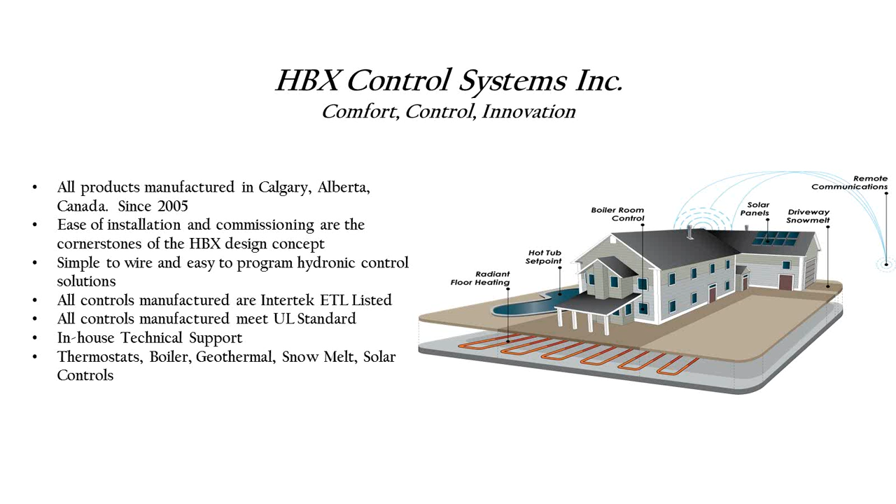Most people will know a little bit about HBX already. Product started testing in 2002. We sold our first control in 2005. So we try to keep things as simple as possible in regards to setting up the control, wiring the control, ease of use. So we have everything from thermostats, boilers, geothermal, snow melt, solar controls.

So with our new CPU-0550 control, we made many changes over the previous CPU-500 boiler control. So we have a new enclosure, a new display, and it comes with a 3-button user interface that's extremely easy to program, and you'll be able to see all your system information on the main screen.

So this control can be used with the following applications. You can use it with staging, mixing, differential set point, or as a pump sequencer. If you need a geothermal application, the previous CPU-500 had that programming inside that control, but now you'll purchase our brand new Eco-550, and that's a dedicated geothermal control.

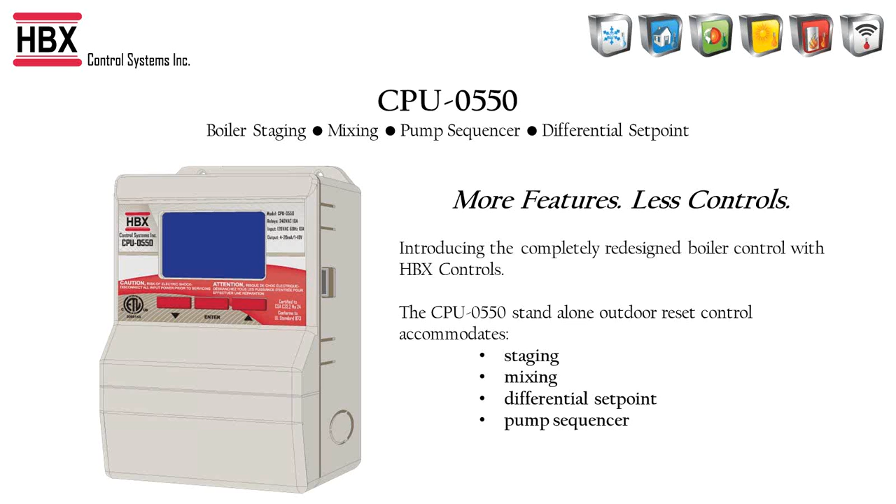So here are some of the main features of the control. You can do up to 3 on-off boilers or a single mod boiler. You can do multiple pump selections, a domestic hot water, boiler pump, a system pump, your boiler runtime rotation. You have multiple mixing options. You can do injection, a floating action valve, or a 0 to 10 volt.

Some of the main benefits from this control is it's really easy to program. It's easy to wire up. We have color-coded and keyed terminals. And all your system info is displayed on the main screen.

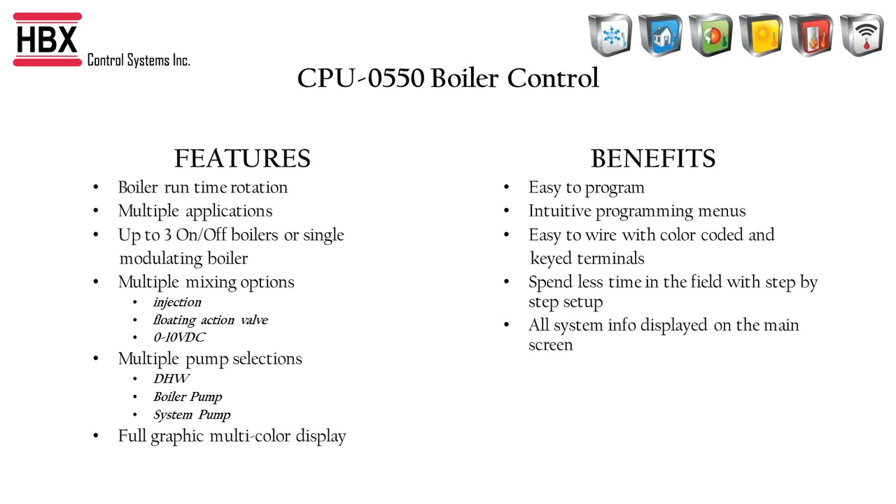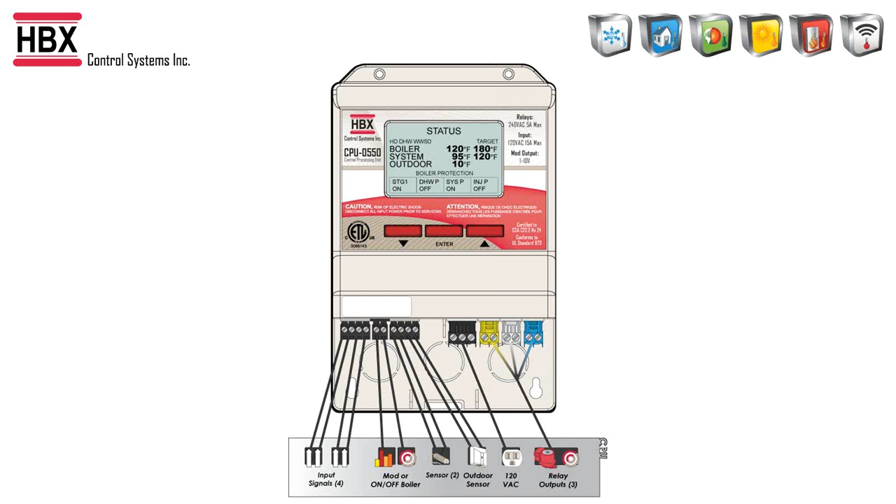So here you can see where you would wire your demand inputs into, where your sensor inputs would be wired up, and then also your relays. Over on the right hand side you have your 3 relays there, 1, 2, and 3, and then your power supply is basically right in the middle of the connectors.

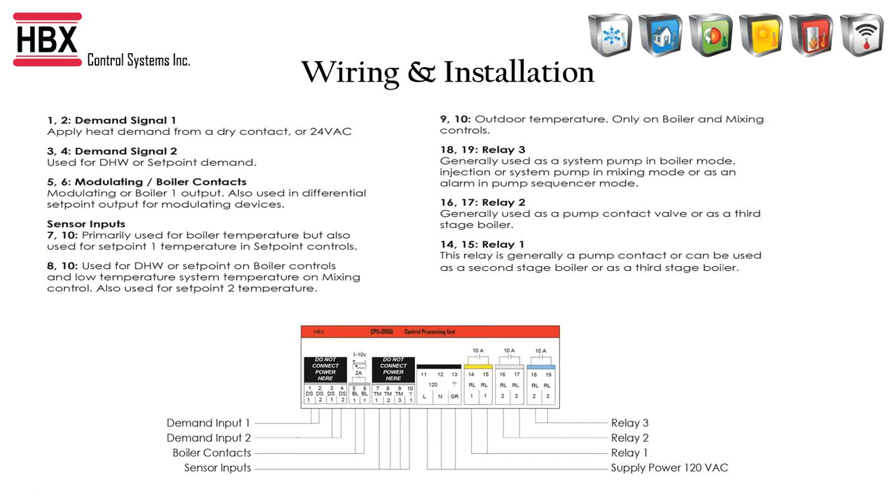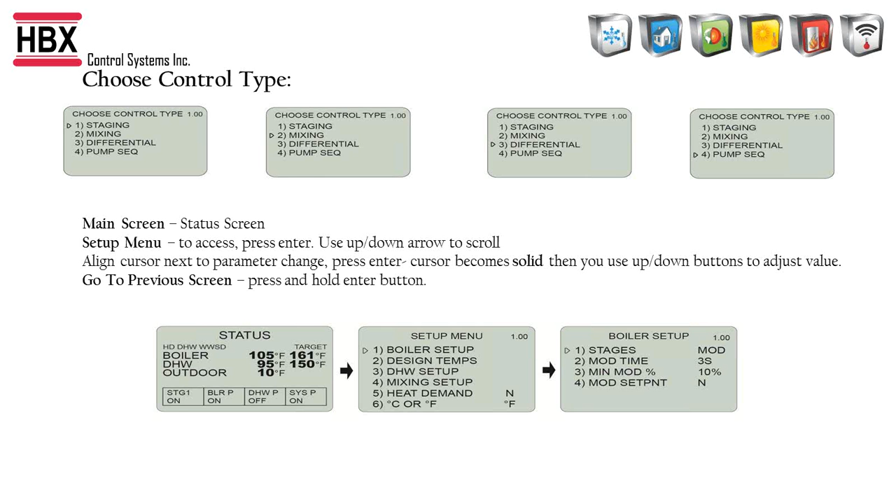So when you first power up the control, this is where you will choose what application you need the control to be. So from there, after you choose, the display will take you into the status screen. So on the 3 buttons, if you press the enter button, the middle button, it will take you into the settings screen. So it'll go into setup mode. And then if you choose number 1, boiler setup, that's where you can get into some further control options and settings.

So we'll get into some of the applications. So as a boiler control, it allows the capabilities to run 3 on-off boilers or a single mod boiler with domestic hot water. So you can see there's a system status screen along with the system function screen on the display. So with the CPU-1000, we had 2 different screens. So what we've done is we've kind of condensed it and put it all onto the main screen, so you can see all your information without having to scroll through multiple screens.

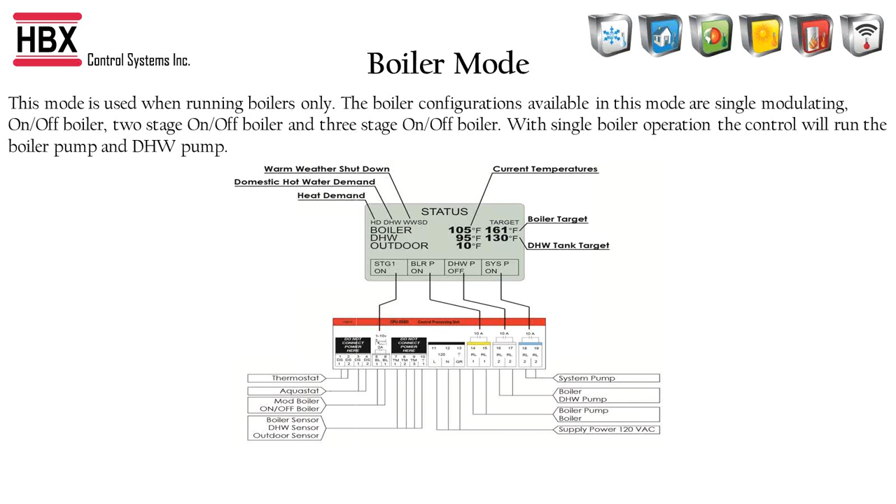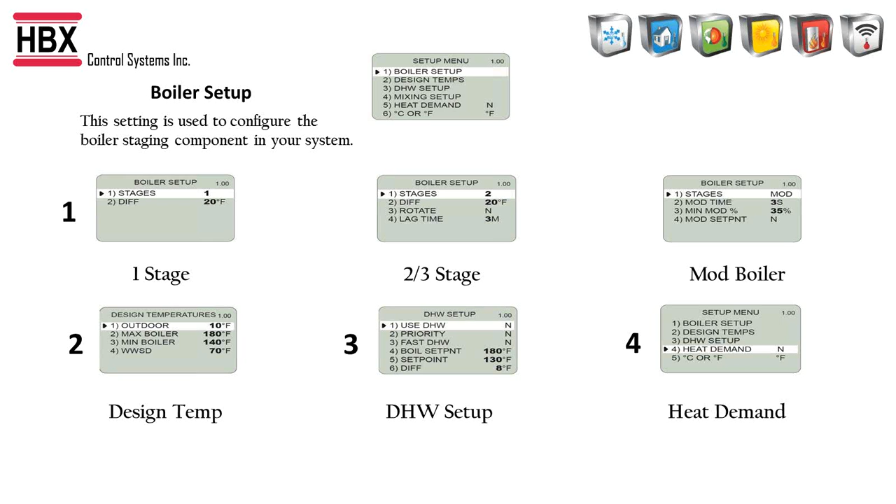So these are the settings in the control you'd adjust when choosing a boiler control. You would have 1, 2, or 3 stage or a mod boiler settings. You'd have your design temperature, a domestic hot water setup, and then also your heat demand. So pretty straightforward for setting up the control with all the applications. There's not a lot of different screens you're going to have to go into to make changes.

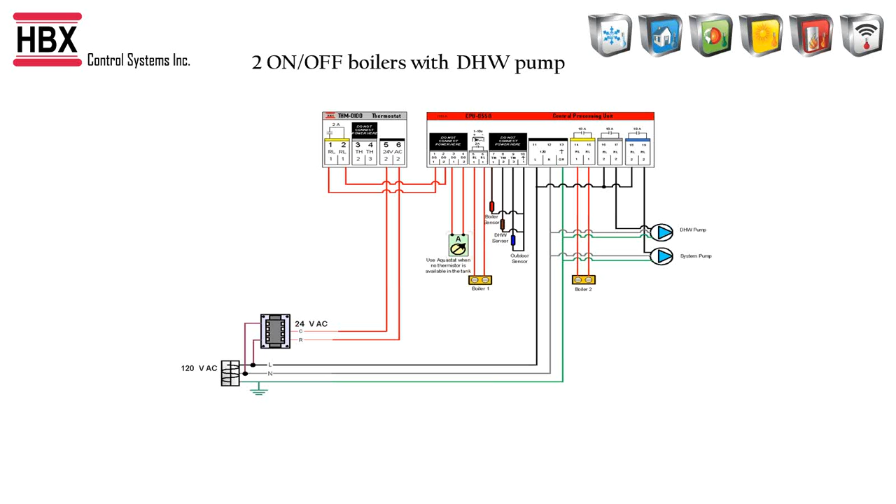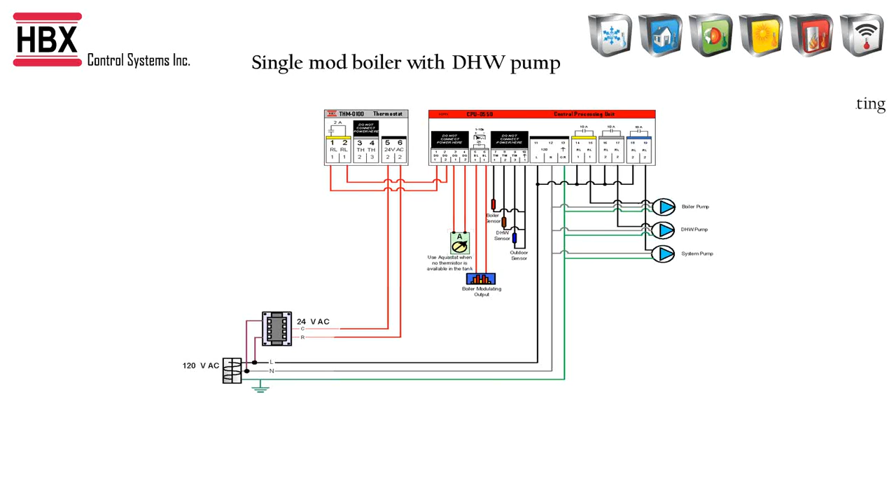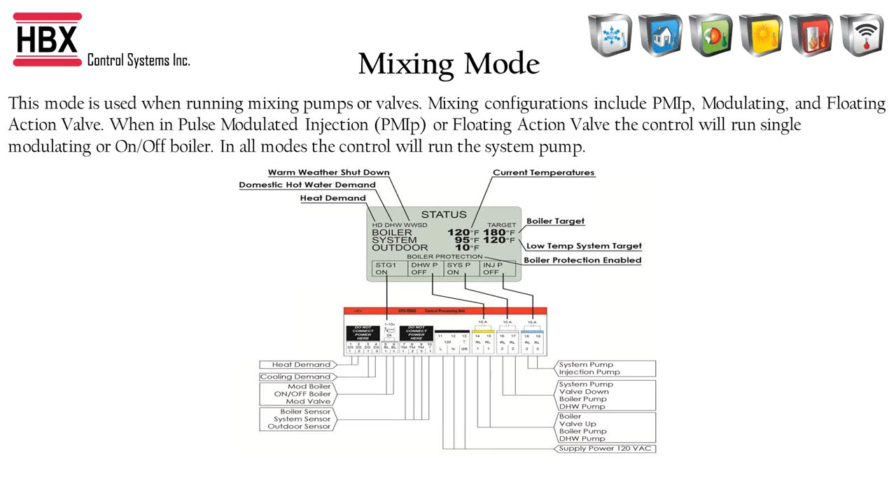So the next one would be mixing control. This control has the capabilities to run a single on-off or a mod boiler. The mixing types include a modulating, a floating action valve, or an injection pump. With the mixing setup, you choose 1, 2, 3 stage or a mod boiler. You set up your design temperatures, your domestic hot water settings, and also the mixing setup.

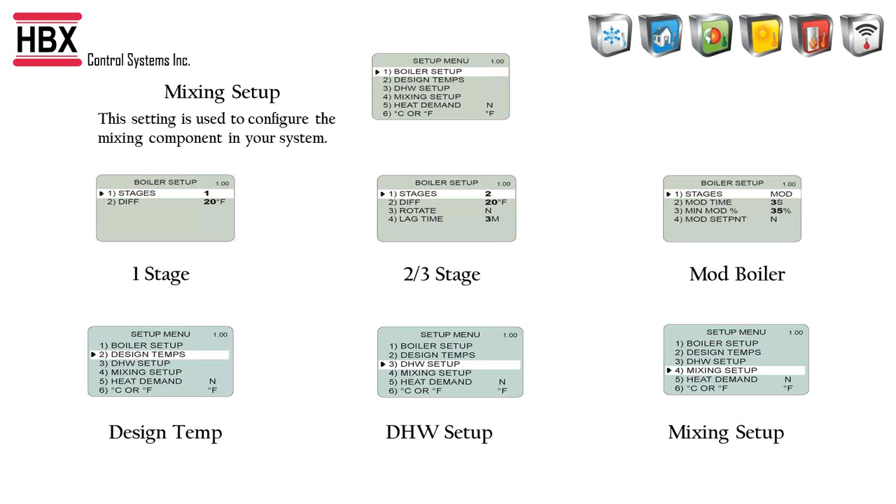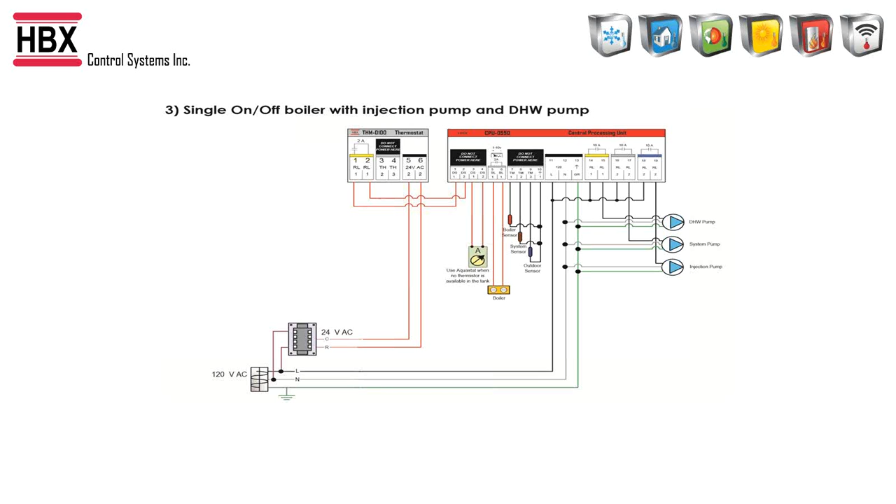And this one is a single on-off boiler with modulating valve output, so a 1 to 10, and also has a domestic hot water pump.

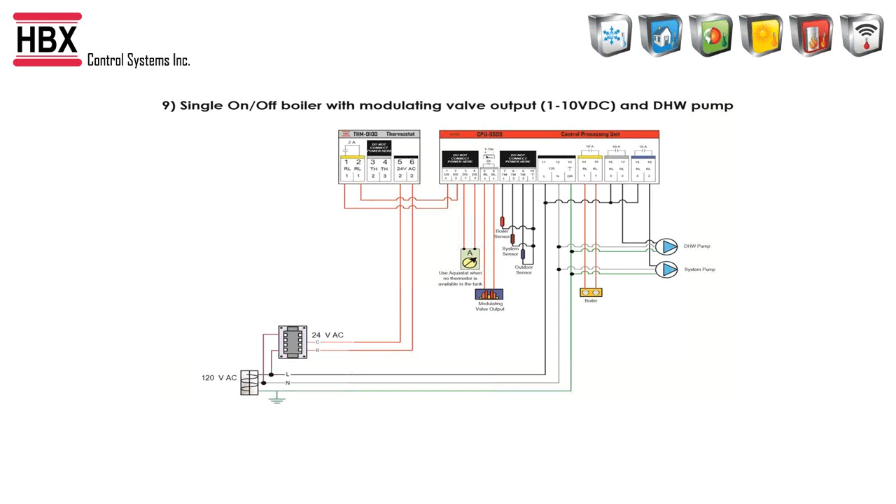And this is a single modulating boiler with a domestic hot water pump also. And then you have 2 on-off boilers with a domestic hot water pump. So all of these wiring diagrams are in the manual. We try to put as much as we possibly can within the manual.

If you ever need wiring diagrams, you can get in touch with customer support or tech support, and they'll be able to give you a wiring diagram based off sequence of operations, or if you have a mechanical drawing and some of your customers need a wiring diagram to go with the control, let us know. We can definitely do that for you pretty quick. The turnaround is really quick with that.

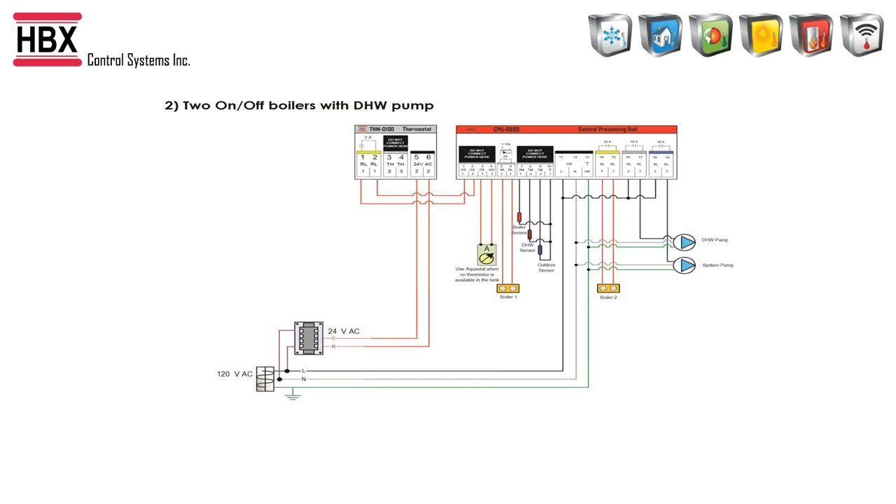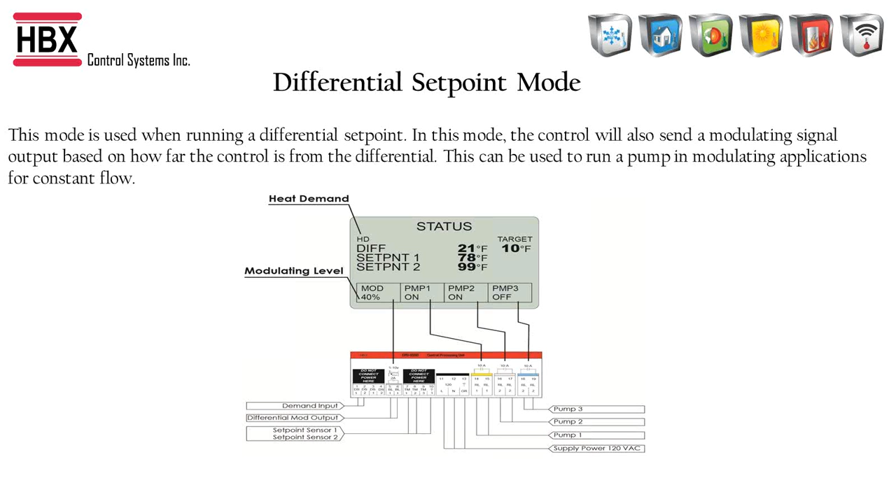So in the differential set point mode, it will allow for dual or differential set point requirements. So you would see the differential that you've set up, and both the set points 1 and 2 that you set up in your control. So with the differential settings, the first one, you're setting up the differential between your two set points. The second one is adjusting your mod time when the mod output needs to be increased or decreased.

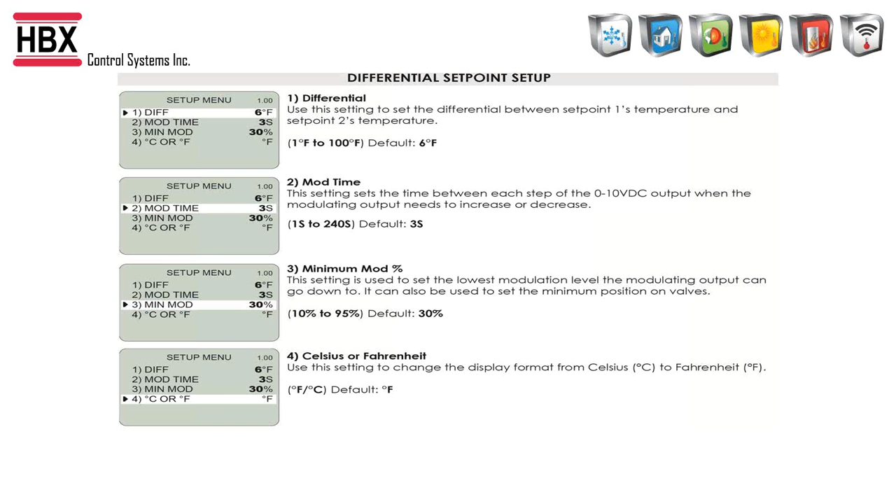So also a pump sequencer settings. The control allows the system to sequence and cycle the pumps, override the pumps, and turn the pumps off when the outdoor temperature goes above the warm weather shutdown. So this provides pump control for 2 pumps. You can rotate on cycles, on time, and if you connect an outdoor sensor, you have your warm weather shutdown. So essentially it's basically a Tekmar 132 control.

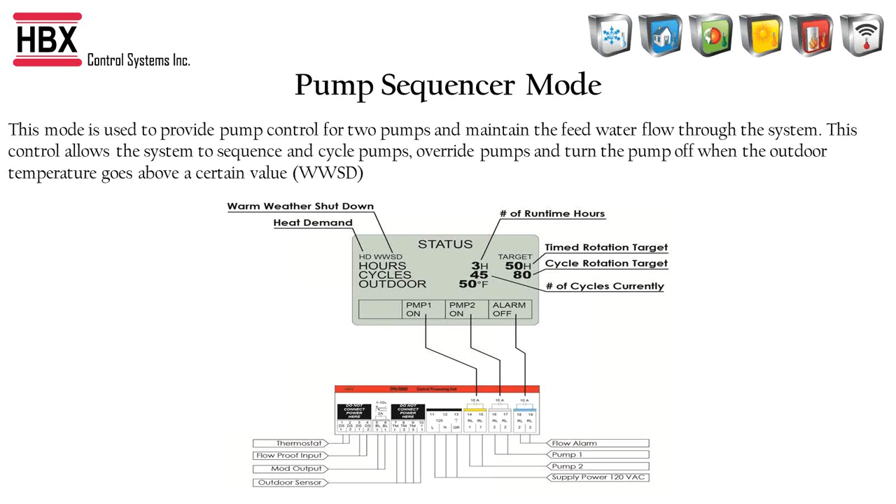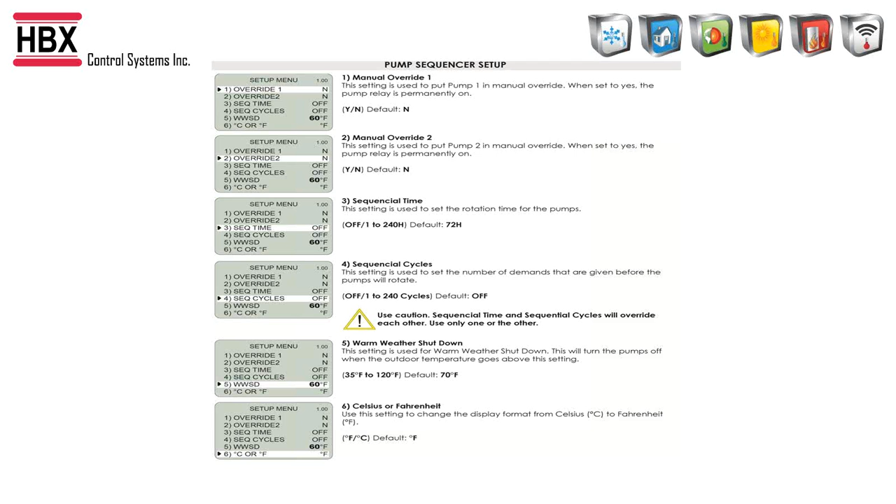So here's your settings for the pump sequencer. You'll set up in the control a manual override for pump 1, manual override for pump 2, your rotation in time, your rotation in cycles, and also your warm weather shutdown settings in the control. And this is a wiring diagram we have in the manual for the pump sequencer. So 2 pumps. So those are the applications you can use the CPU-0550 for.

Like I had mentioned previously, the CPU-0550 boiler control also had geothermal settings, so I will very quickly touch upon that since we now have a dedicated geothermal control. So with our Eco Control, it'll run your heat pumps or your chillers. It'll run your reversing valve. You can run a single or a dual tank system. It also has outdoor reset on the hot and the cold tank. You have your warm weather, you have your cold weather shutdowns. You can rotate on time or on cycles.

And as an Eco Control, this can do everything an Eco 1000 can do, but it can do 3 stages. So the previous one only had 2 relays, so we've added an extra relay so we can really get into a 2 heat pump and a backup option, which gets us into the majority of the applications out there without having to get into the Eco 1000. So it'll save your customer some money at the end of the day, not having to purchase the 1000 series controls. Currently the Eco 550 isn't an expandable control, and that may change down the road.

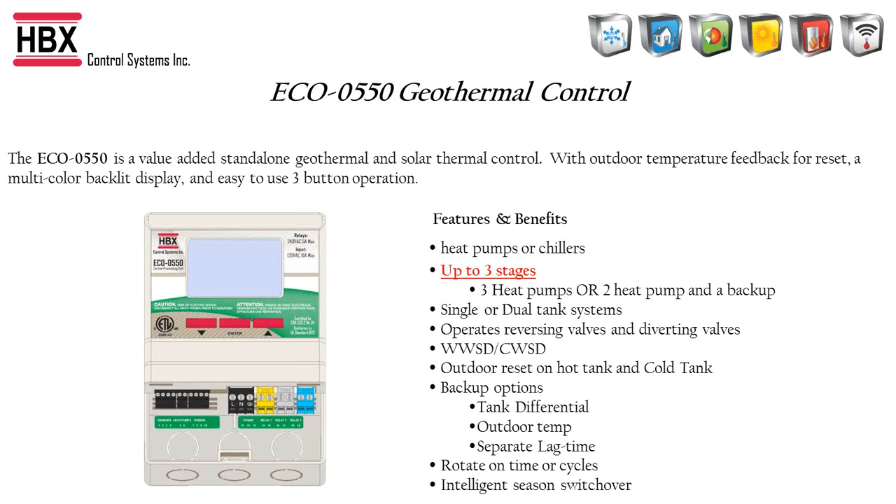So with the new display, you'll see all of your system information without going through multiple screens also, just like the CPU 550 control. So if there's a heating demand or a cooling demand, it'll show your temperatures for current application along with the targets that you've set up, which heat pumps are on or off, along with the backup and a reversing valve. This also has a multicolored backlit display, and this just gives you a visual on what the system is currently doing at that time.

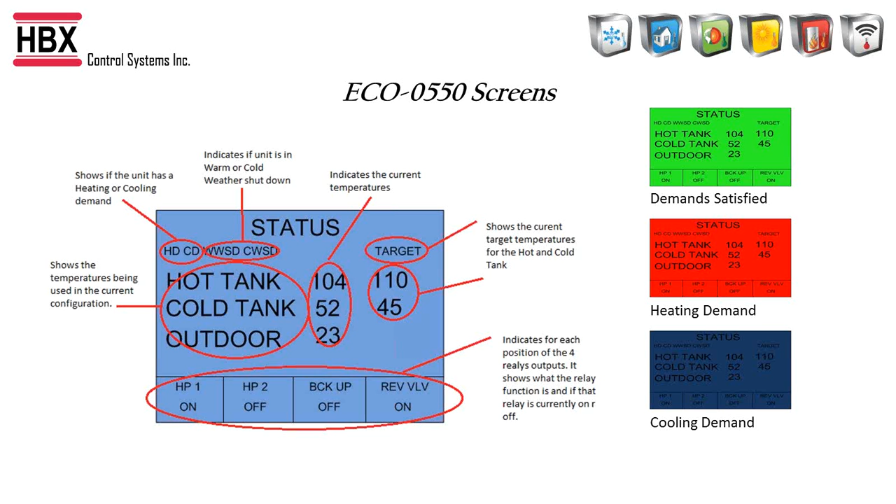So if you walk into the mechanical room and you see, let's say, green, that means the demand is satisfied. If it's red, there's current heating demand, and blue, the cooling demand is on. So the same goes for the CPU-0550 control. It also has a multicolor backlit display.

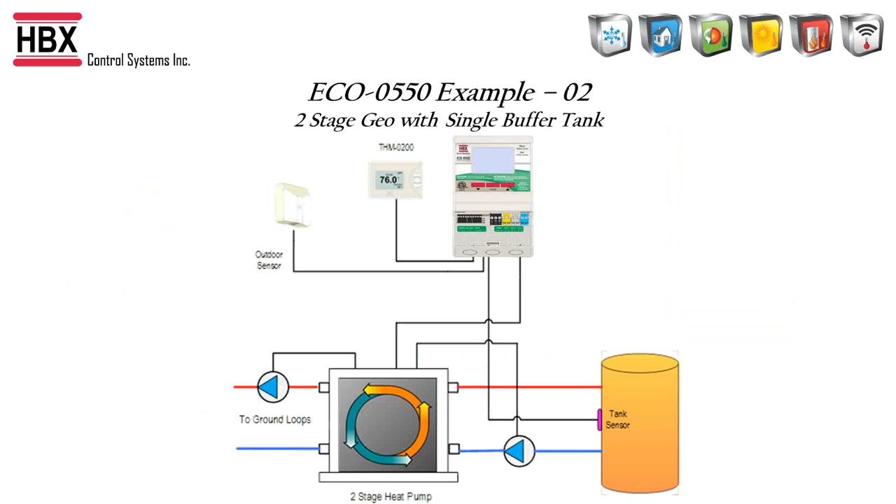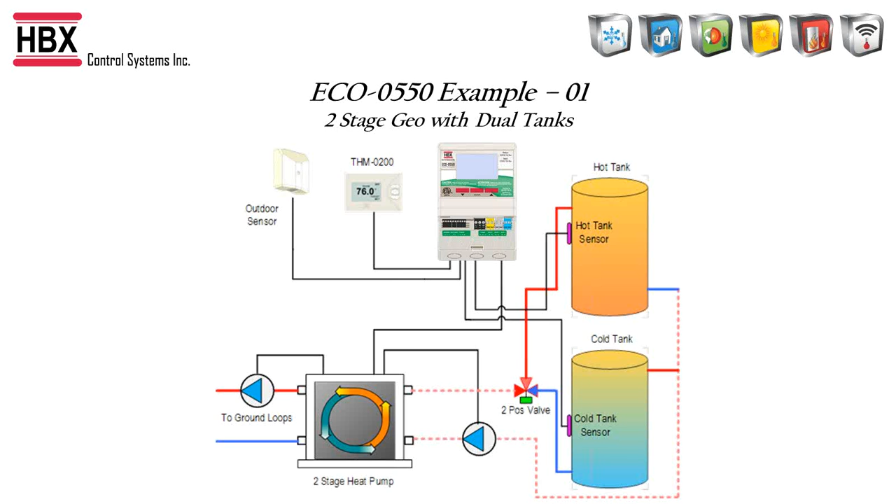And then this is just showing that you can do a two-stage geothermal using a single buffer tank. And then this diagram shows a two-stage setup running both hot and cold tanks, so a dual tank situation. So that's it for the CPU-0550 control.